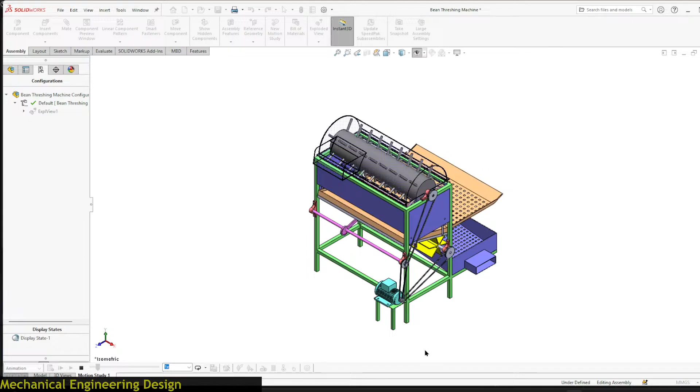Now, what is a bean threshing machine? This machine is used to separate chaff from the beans. After harvesting the beans from the farm, you let them dry for like 2-3 days or even a week. When they are dry enough, you need to separate the beans from the pods. Now, when you are doing large quantities of beans, you need to automate or use the machine to help you simplify the job.

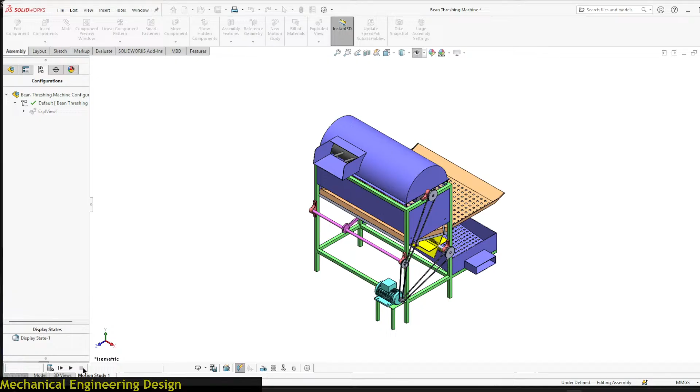One of such machine is what we are seeing on the screen. So this machine contains several parts. We have the hopper, where you feed the beans with the pods and everything. Inside, we have a rotating drum with spikes, which will crush the beans and separate them from the pods.

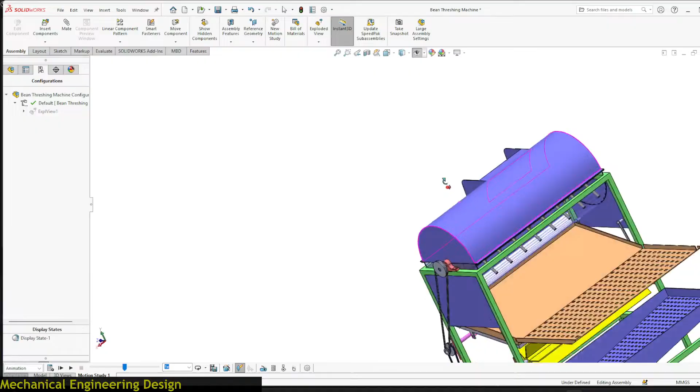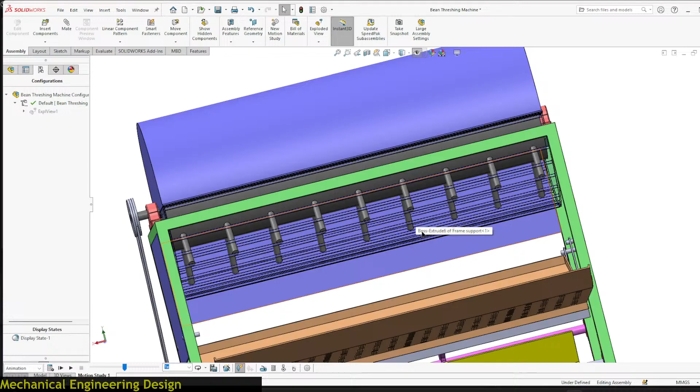On this other end, we have an opening now. We don't give long time during the process of crushing, so as they crush, they are released throughout the mesh at the back, and they are able to land on the receiving sieve at this point.

So as they land here, this sieve is always shaking. It's moving back and forth. So this will allow the heavier beans to go below and the chaff to remain on top.

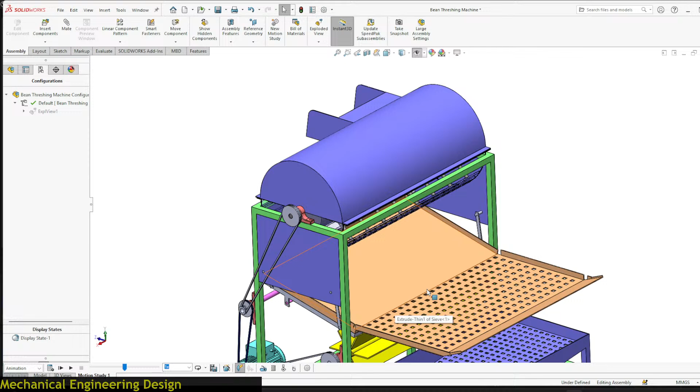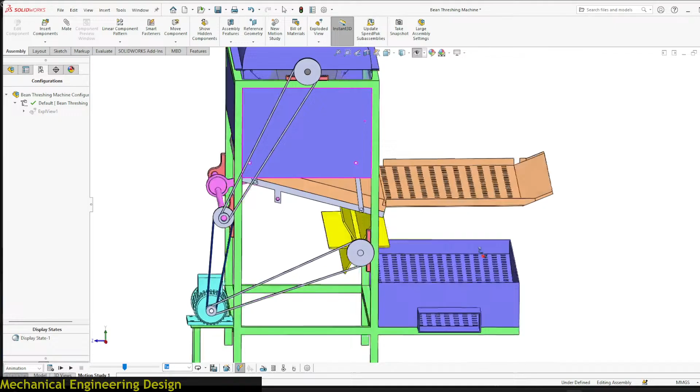So as the shaking continues, the chaff will be able to drop on this end, and the beans will penetrate through the sieve into the receiving tray here. So on the receiving tray, these holes are smaller than this one. So the purpose of these holes is to separate the beans from the sand and other solid particles.

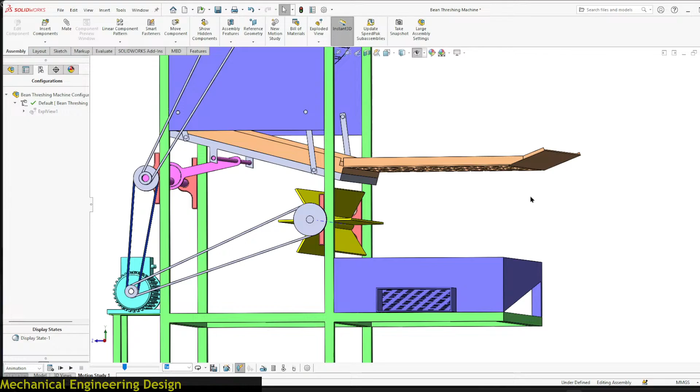At the same time, we have a fan on this side. So this fan will be rotating counterclockwise direction, blowing away the remaining chaff, ensuring that we only have clean beans dropping on this receiving tray. So on this end, we have a small hopper where we'll now collect the already clean beans.

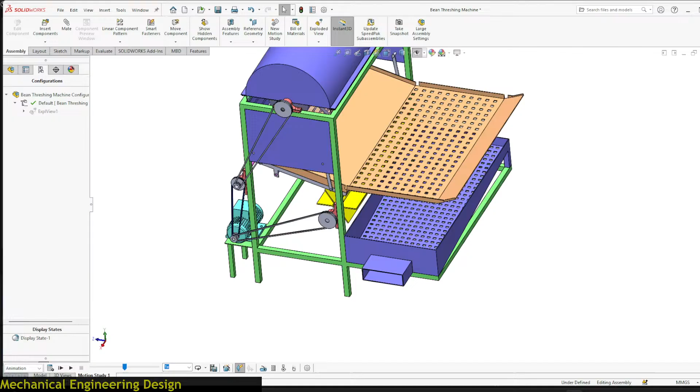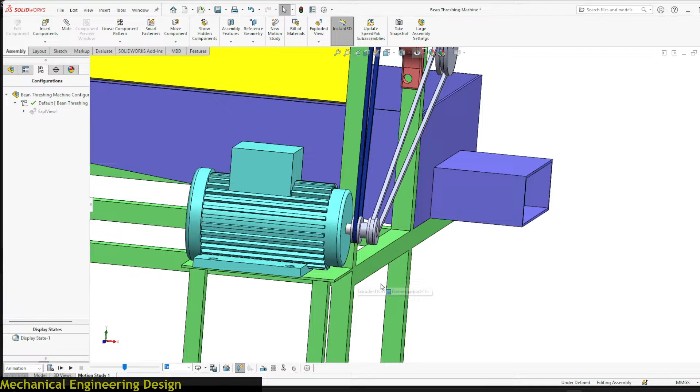Now, what is employed in this mechanism? We only have one motor to run all the mechanical operations. This motor has a pulley which has double sections. One side connects to the fan and the other part connects to the reciprocating mechanism or the shaking mechanism on this point, so it will be able to rotate this shaft.

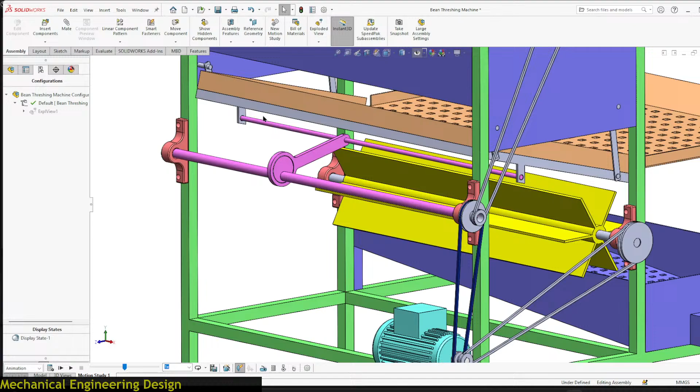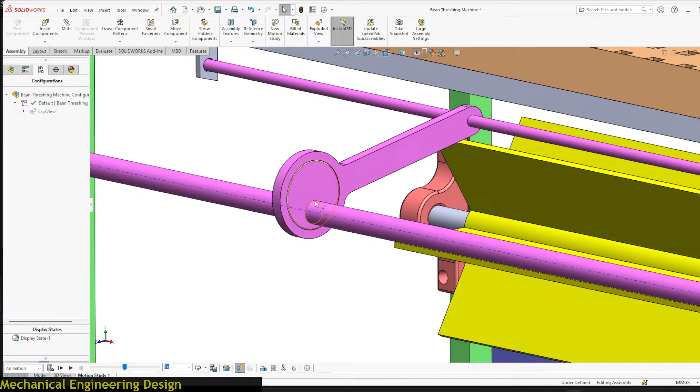So how we are able to achieve the shaking mechanism is by use of this bearing. So this bearing is free to rotate on this blade, and it has a hole which is eccentric to its center. Now this shaft is fixed to this bearing. It is welded together, but it's free on this side. So as it rotates, the distance between the center of this shaft and the original center of the bearing gives the displacement. That's what gives us the shaking mechanism.

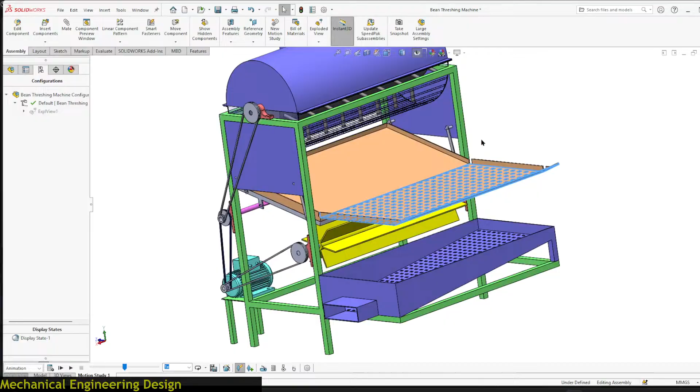On this sieve, it is suspended. As you can see, it's suspended with these two plates. Let me show you from the inside. We have two plates. One is this one and this one. So there are two on this side and two on this other side.

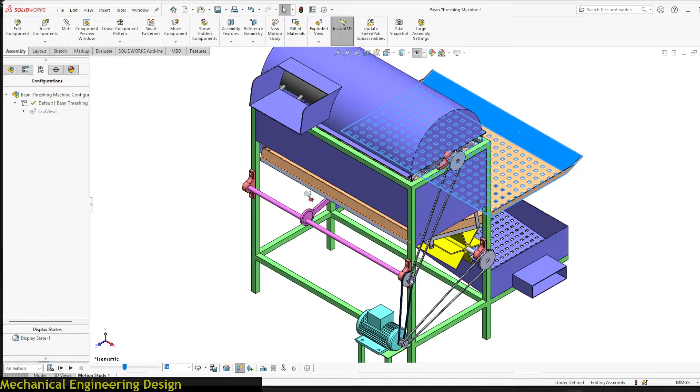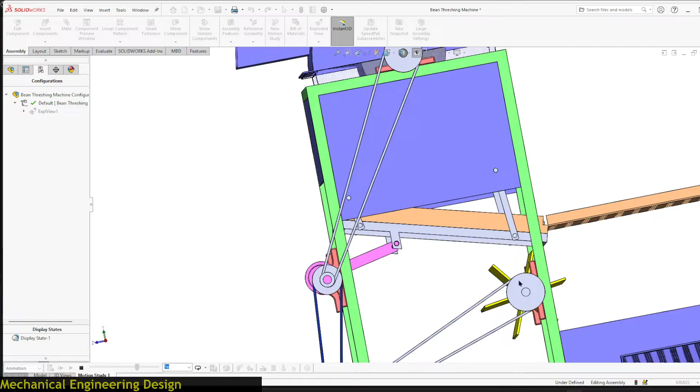Now look at the process. So the sieve is able to shake, and we can achieve the shaking mechanism while the fan rotates counterclockwise, blowing the wind against the direction of flow of beans.

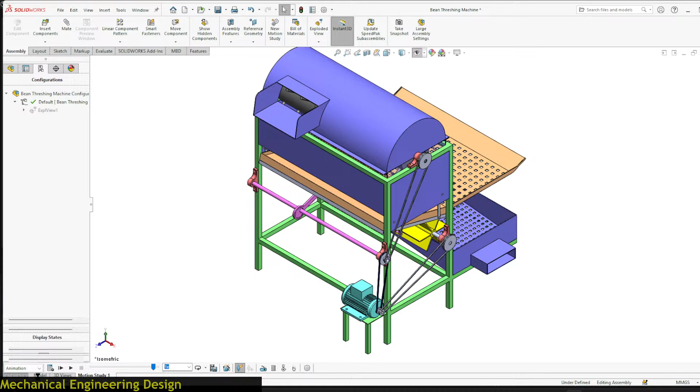So in the next part, I want to show you the exploded views of all the parts. Now we come to model.

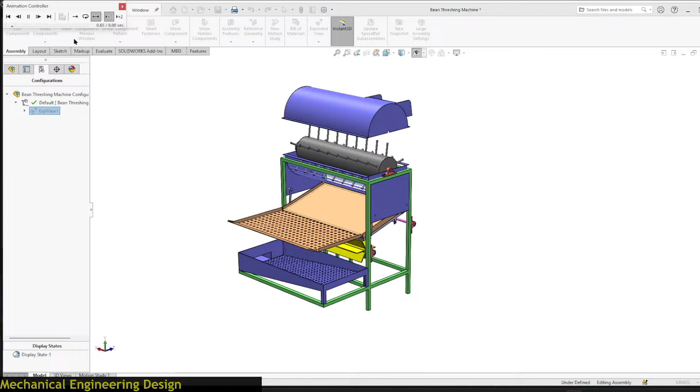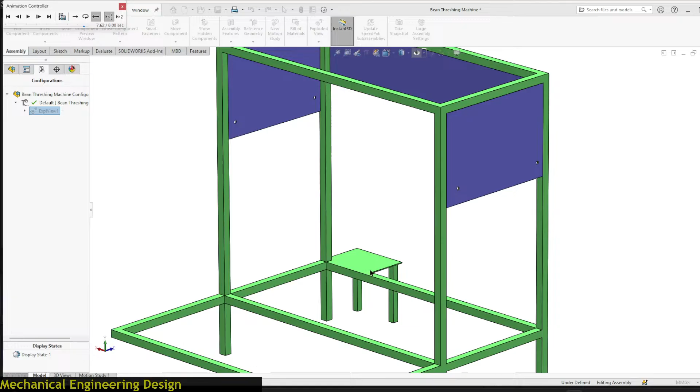These are all the major parts that makes our bean threshing machine. Here we have the main frame, and this frame has an extension on this side which we fix the motor. The frame supports all the parts of this system.

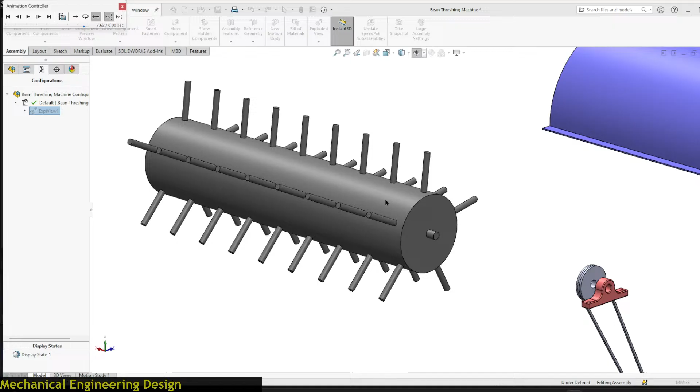Now, this drum is what brings about all the threshing process. It has these spikes welded on this surface. So this drum is supported on both ends by two bearings, which is this one and this one, and of course the pulley which transfers the motion.

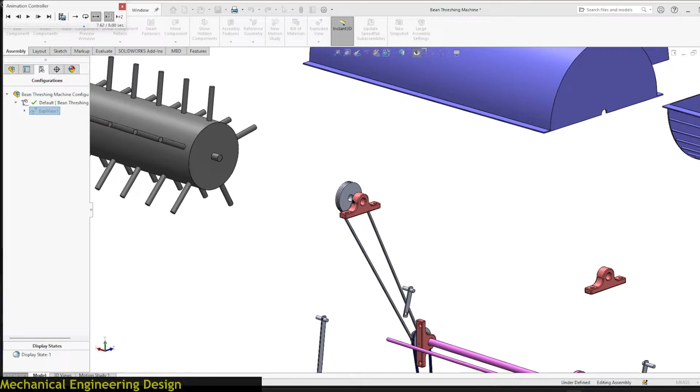So we shall have this cover on top, while this other one below it. So the top cover is enclosed, while the lower cover has this mesh to allow the flow of beans and chaff. So the top cover has got the hopper where you do the feeding.

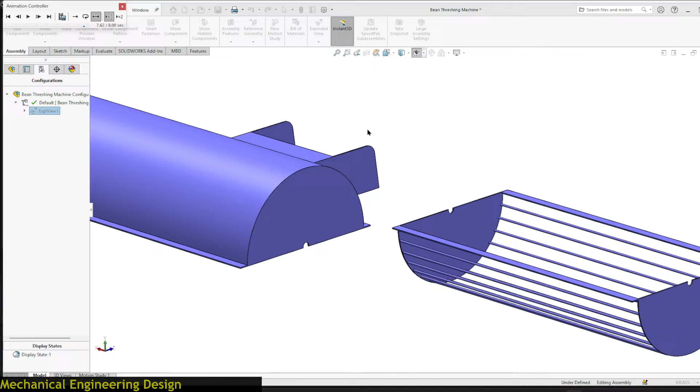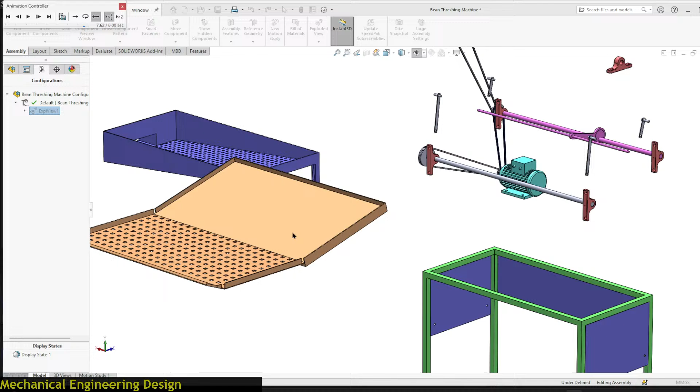And we can come to this frame. This frame is used to support the sieve. And then we have the receiving tray, which is also slanting to allow the beans to flow by gravity.

And that's all about bean threshing machine.